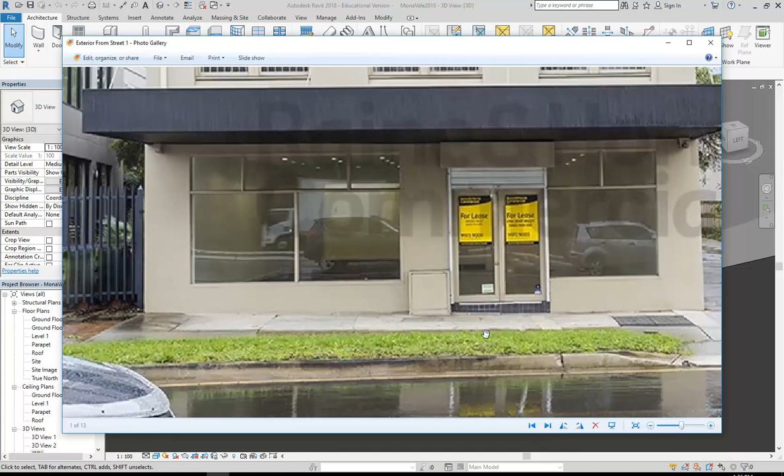So I'm going to make a verge out the front of this shop, which is what's there in reality. I've got this bit of lawn planting out there in the footpath. So I'm going to add that in, go to the site floor plan that I've got, and make a sub-region under Massing & Site.

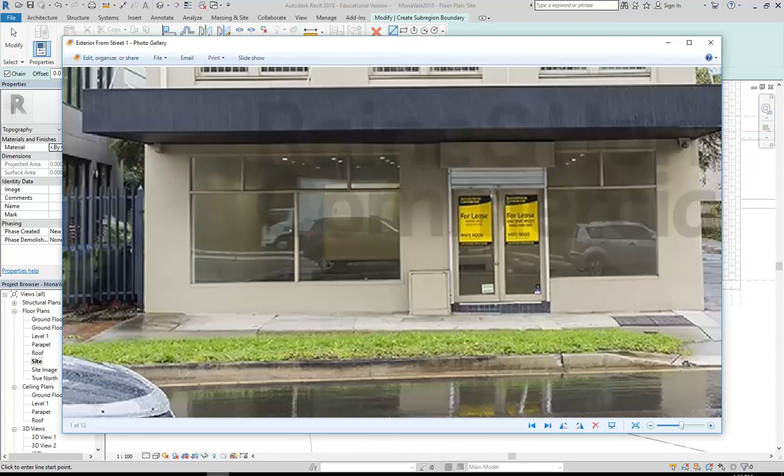We'll go to sub-region and draw the basic outline we want for that bit of lawn. So back at the photo, it starts just next to the driveway. We don't need to be too precise here, but it's basically somewhere above that line that marks where the driveway is, so that's about here. And it looks like it's essentially in front of the line of the awning, so I might just follow that awning there.

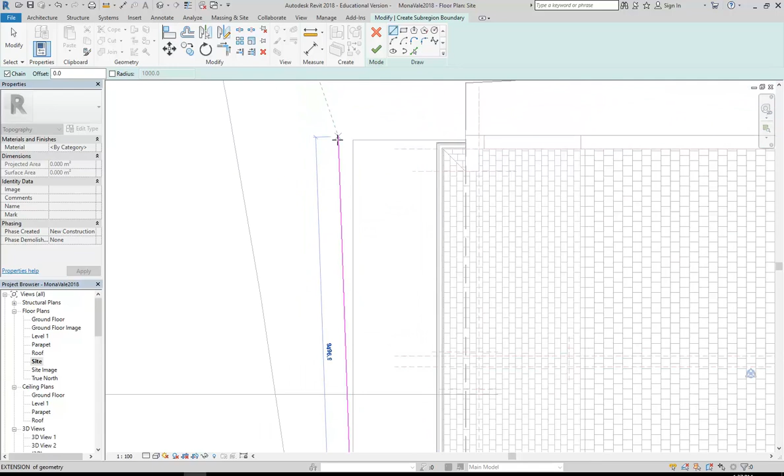Maybe I'll bring it away at an angle because it does seem to follow the road a little bit as well. And then come back to here, again just following along that line, which is actually a curve, so I'm going to switch to draw that with an arc.

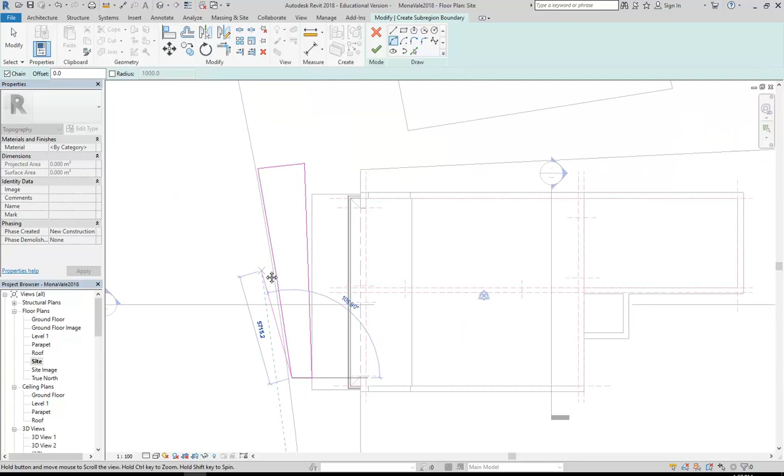Notice how I'm leaving a gap between the road, or the gutter that runs alongside the road, and this shape that I'm making. If you try to put them right next to each other, you'll often get errors with sub-regions. So try to leave gaps between them if you can.

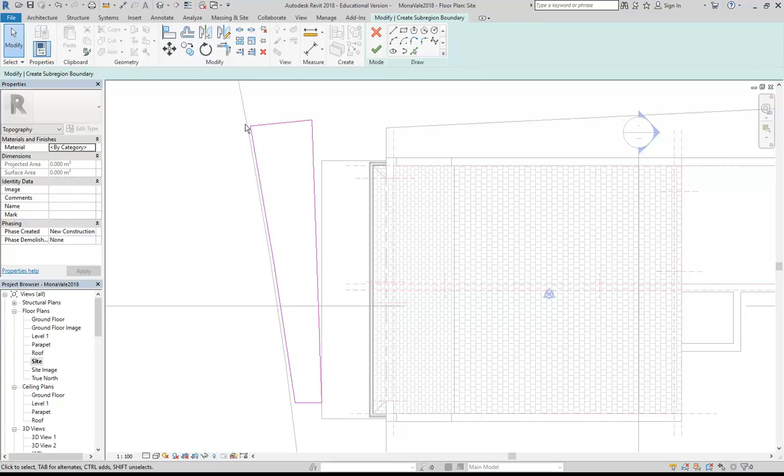If you do need to have them butting up to each other or touching, a really good tip I can give you is that you should draw either detail lines or reference planes so that you can trace them. That usually works much better than just drawing them on their own. So that's just that technical issue with sub-regions.

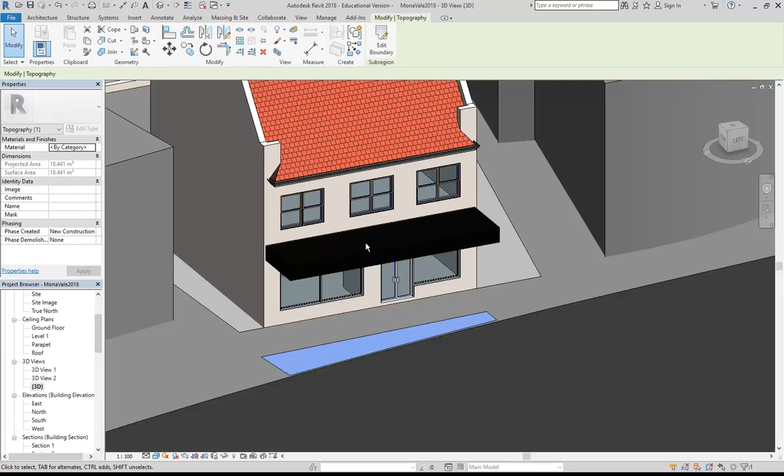So remember, sub-regions essentially can't overlap, and that's why it can be really helpful to either leave a gap between them or draw something else first that you can trace. There are quite a few things like that in Revit - building pads are similar.

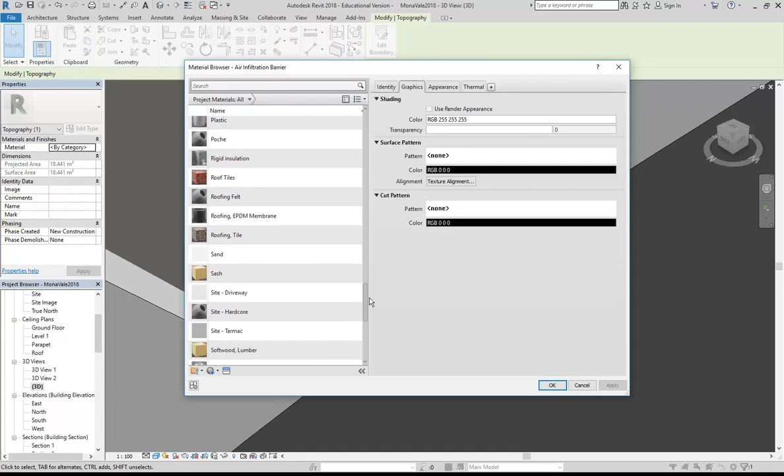Okay, but anyhow, so I've got my sub-region shape, and now I want to assign my grass material. I'm going to go to here, where it's got the material slot, and click Browse. I think I already do have a grass material that I made earlier. Oh no, so I made a tarmac, not a grass. So, okay, I've got site tarmac and site driveway are the two site materials I made.

You can choose any of those, so I'm just going to start with the tarmac one. Right click and duplicate. So if you don't know any other way of making materials, that should be maybe the first method that you get used to. Do any of you use the other way to make a material from scratch?

I'll just show you, just so you know, because you've probably been using the program for a while now, so you might have seen that there is this option to create a new material down the bottom. That's more work - if you do that, you've got to set all the options, and think about the physical properties and lots of other options that you don't need to worry about. It's usually easier to duplicate an existing material.

It's less work. So here again, if you find one that's similar to what you want, right-click and duplicate, you can give it the new name - it's like grass. Whoops. Where did that go? So, yeah, okay, so site grass.

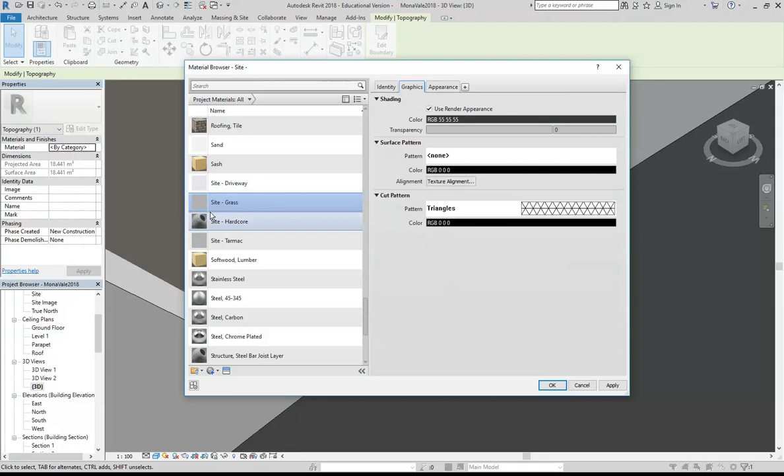And then, so this should be your thought process: once you've created the new material in this list on the left, you then need to think about the appearance usually. You should always look to see, when you're working with the appearance, if there's a number above that hand. If there's a number there, that means it's being shared by another material. So in other words, this site grass material was made by duplicating site tarmac, so they're sharing Asphalt 2.

And if I adjust it here, it's going to adjust the tarmac material. So it's really important that you change that either by using duplicate or replace. So I'm going to go to replace.

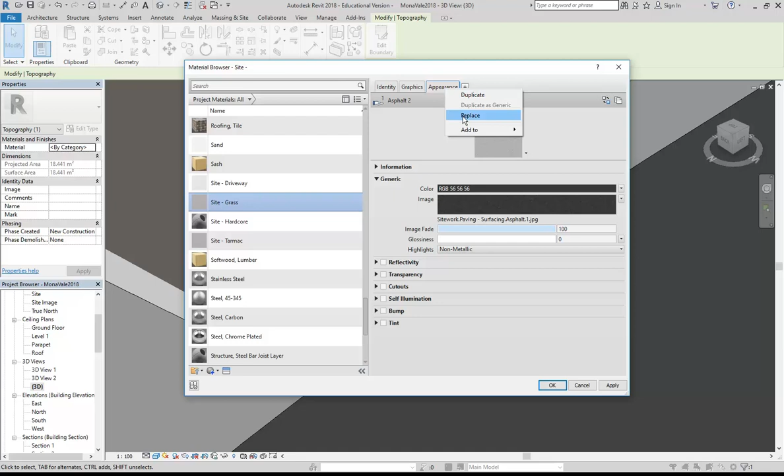And then you'll often hear me say that there are materials that come in the library that you can access from anywhere - what I mean is this. This is the rendering library, and you can see you've got all these different folders. Most of those folders are from what are called physical materials.

And they're useful if you're doing thermal analysis and more complex technical analysis, which you probably won't need to do. I very rarely do it. I've taught environmental analysis subjects, and even then we use those materials fairly rarely. So you can ignore anything there that says physical and just go straight to the appearance library, and it's got more in it anyway.

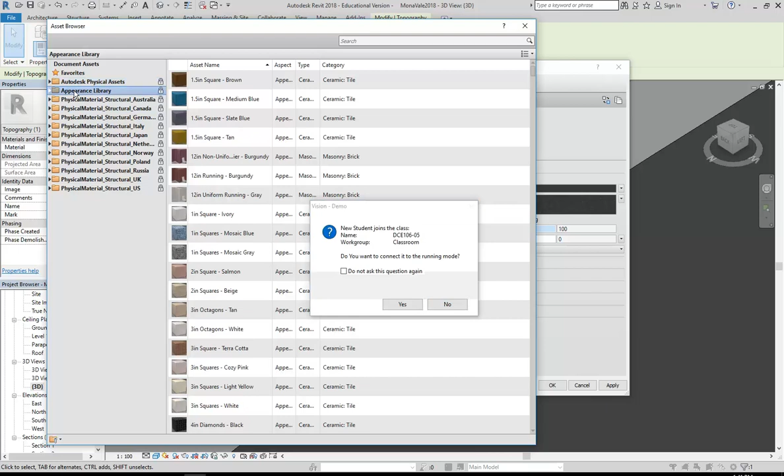If you expand that, you'll see it's got all these subfolders. If you have a look at the others, you can see they don't have as much. Right, so even this one, physical assets, that has a big list of folders, there isn't as much in there. So the appearance library folder is the big one.

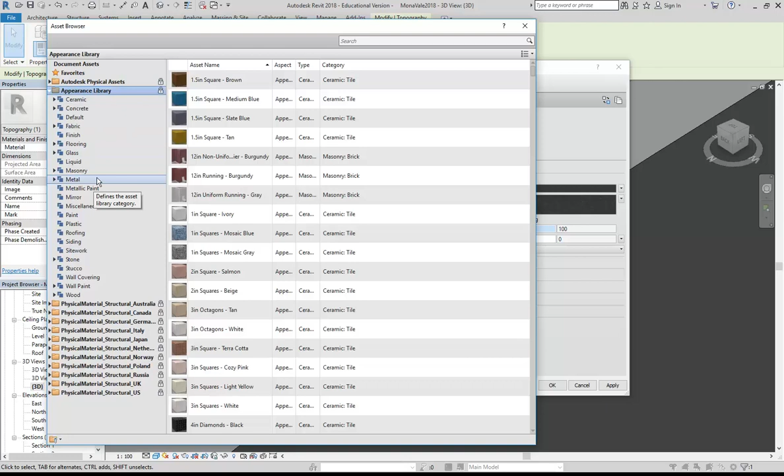And so then you've got site work, and all these different site materials, and you can see there's a pretty decent selection of grass materials. So maybe I'll start with this grass dark rye, but you can start with any. Double click, and that'll give us a basic setup for a grass material.

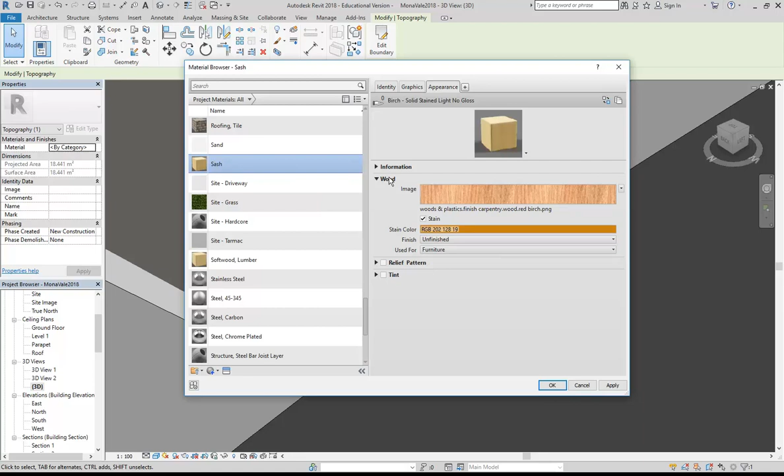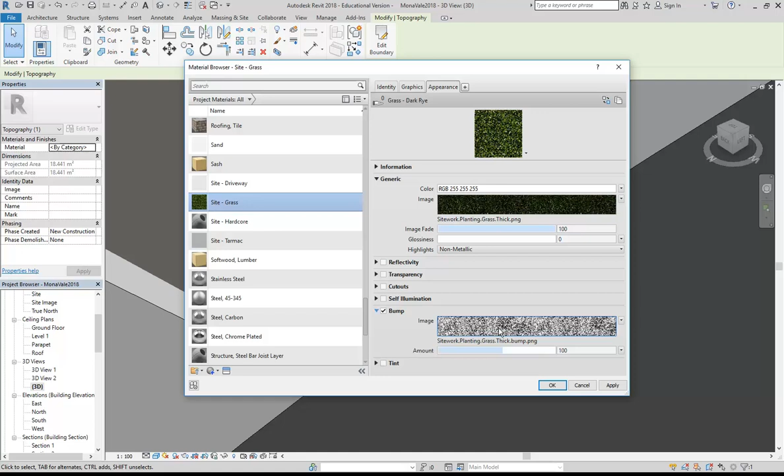The first thing you should always look for when you've made a new appearance is the type of material it is. This is a generic material. If I go to this sash, for example, you might see it's a different type - it's wood, so it has different properties we can adjust. But if I go back to site grass, again it's generic, and generic is basically the base material, so it has the most options you can adjust. In this case it's only using the colour, the main property in this generic panel, and the bump. If I expand that, you'll see it's got a black and white image based on that colour image, so they work together.

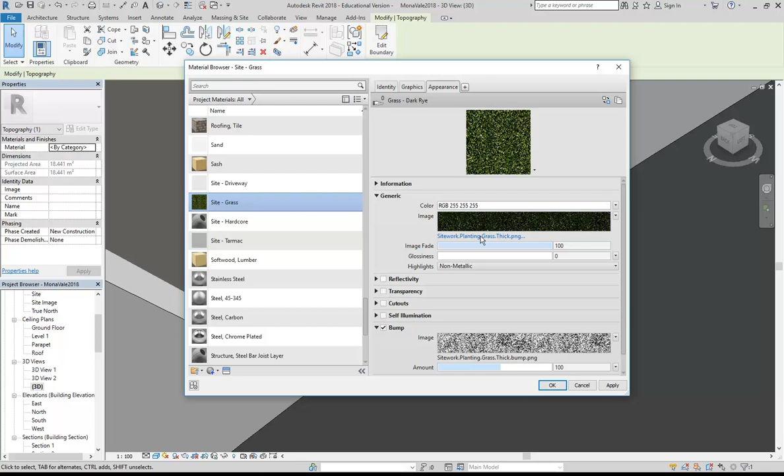So I want to change these to a better one that I've got. I'm going to click on the file name, just below the image swatch, where you've got the file name. It'll bring up the default Autodesk Material Library folder.

If you haven't seen this before, these are files that you'll have installed on your computer whenever you install Revit or a range of other Autodesk programs. It comes with all of these files.

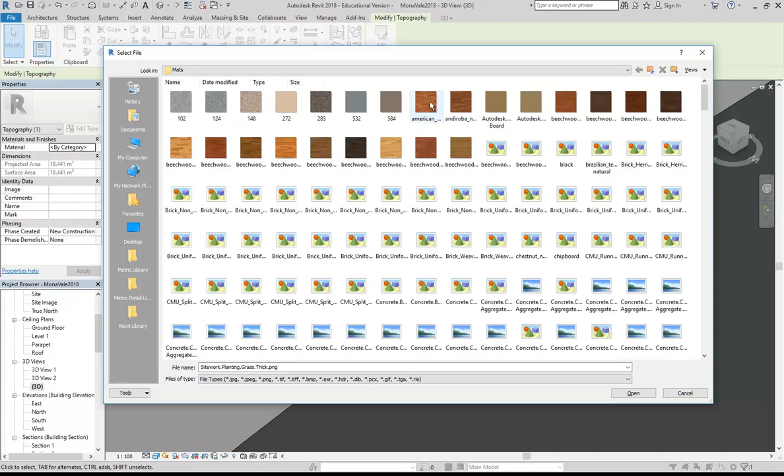Do you know what format they are usually? Yeah, they're a type of bitmap. Yep, there are lots of different bitmap formats, and as you use Photoshop more you'll get familiar with them, but you've probably heard of many. What's the most common? It's not BMP - that's the old bitmap format, but there's a much more common one you'd all know. PNG is the new one - that's pretty common, these are PNG, so that's spot on. But there's an older one that's still probably a bit more common - JPEGs, that's right, JPEG is the most popular. They're nice small files, and PNG is basically the new JPEG.

So PNG is great, you can use any of those formats, and if you look down the bottom it tells you all the different formats it can use - JPEGs, PNGs, TIFF, a really important one for high quality, EXR, a really advanced format, HDR as well, GIF, and TGA.

So you can source any of your own, and if you're looking for materials, that's what I'd recommend searching for. Don't try to find pre-made materials other people have made - it won't give you very much, and it won't work the way you want most of the time. You're much better off just searching for these base textures. I know a lot of people who just make materials for a living, working in 3D firms - that's a specialist field. They're really talented, often with training in fine arts or visual arts, and they can paint and do amazing things with a 2D medium. They scan it in or paint it directly in Photoshop to make these images for use in materials.

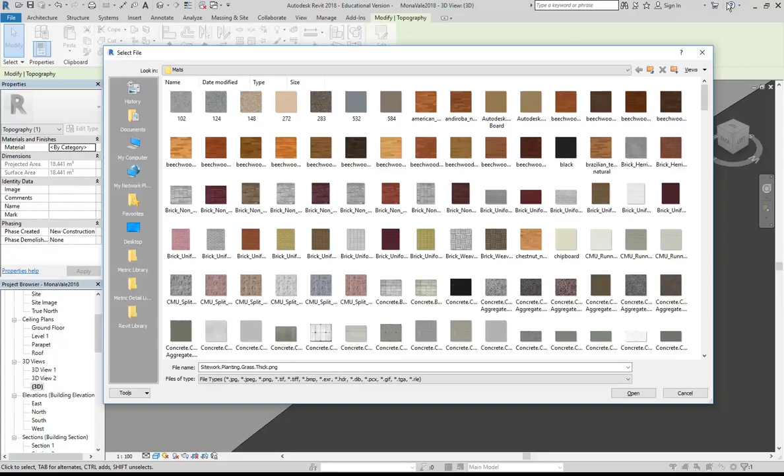Okay, so again I can use that grass I've saved for you, and this is a really good one. If you go into the P drive, into interior design, then 3D and digital presentations, I've saved a grass seamless texture.

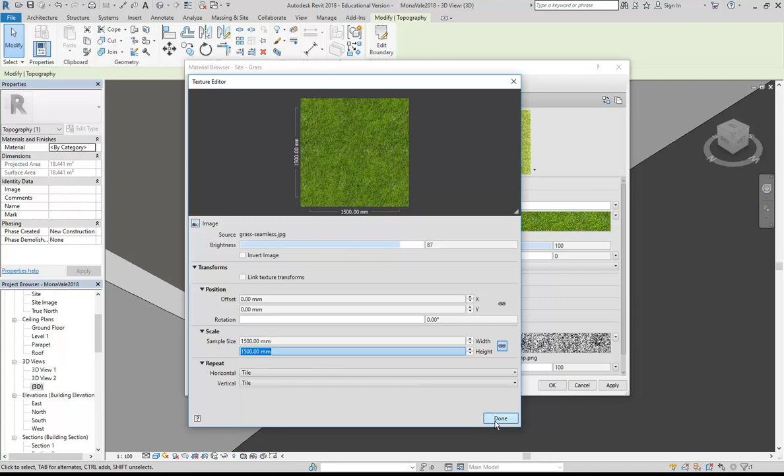So then to see how that repeats, I'm going to click on the image swatch and just check the size. It's about 1 metre by 1 metre - that's probably a good size, but maybe I'll just change it slightly, I'll make it 1500 by 1500. Oh, just the way the image is. So yeah, it repeats without the joins being obvious.

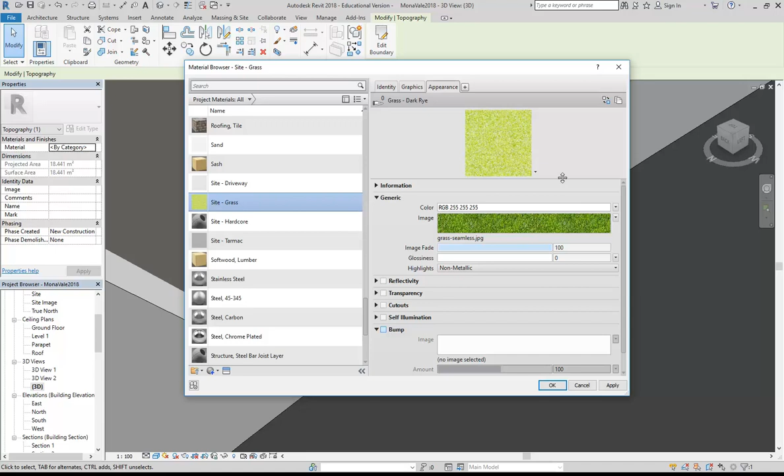And so then the bumps - if you're doing a high quality render they might be useful, but in this case I'm just going to turn them off. You don't always need the bumps. Now that should be assigned, but if I select that again, you've probably seen this before, it doesn't always work the first time. It'll make the material, but sometimes you have to go and assign the material twice - it's just one of those bugs with Revit 2018.

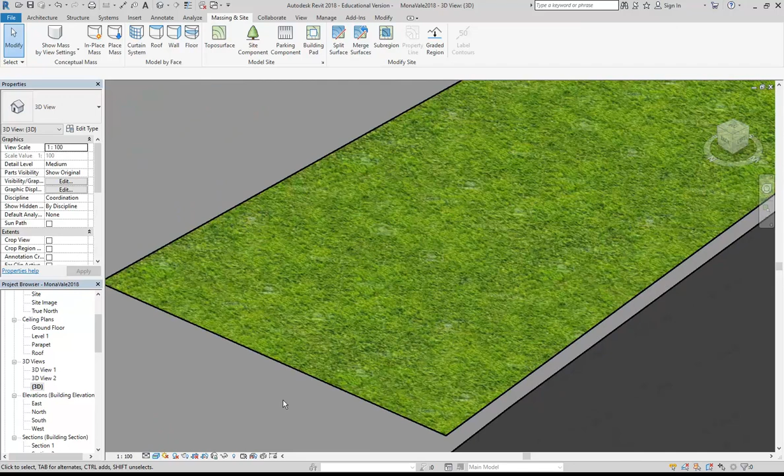Otherwise though, you can see now we've got Revit grass. So I just want to go over that, make sure you can assign materials to all those parts of the exterior that you need. And then, again, when we start modelling the interior, we can go further with materials and look at some of those other options.